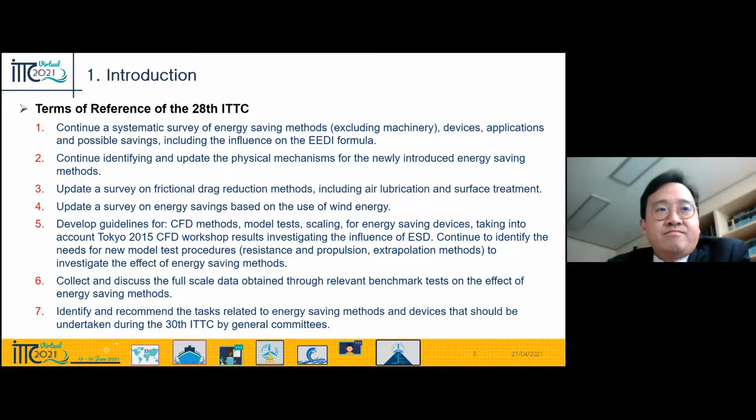As a matter of fact, this category was established in the previous term. It remains essentially unchanged. The primary category is about the principle, which means where the energy saving comes from. There are 4 primary categories regarding this.

The direct reduction is the first one, and reducing propulsive losses is the second, followed by use of renewable energy and operation, which will be shown in the next slide.

Each primary category is subdivided into specific mechanisms, how the energy saving principle is achieved. During the present term, the committee searched for new mechanisms, so a couple of modifications have been made for the gate rudder, and ducted contra-rotating propeller was added.

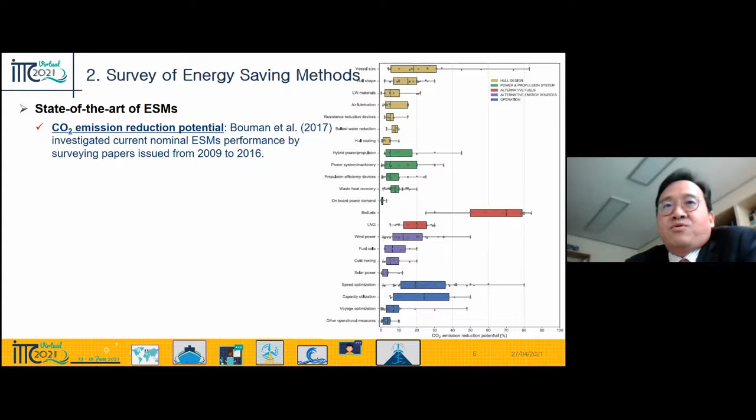The most notable technique is the air lubrication method, with several papers published based on both model tests and numerical simulations.

Another promising technique for skin friction reduction is to use low frictional coating. More and more interest is drawn to the effect of hull coating on energy saving performance. Goler and Bozkurt's work in 2017 is notable in that they analyzed the effect of hull coating on full-scale ship performance for 8 Ro-Ro vessels.

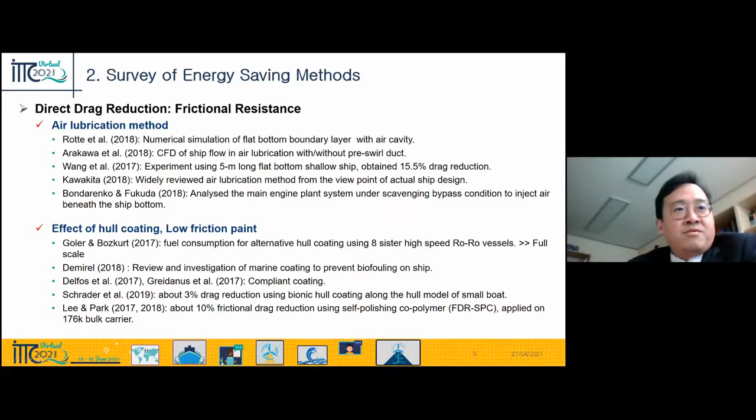Others are also notable, and let me move on to the next slide. The next technique is hull form optimization to reduce either viscous pressure resistance or wave making resistance.

If the hull form in the after part is improved, then viscous pressure resistance is reduced, and if the fore part is improved, then wave making resistance is reduced.

This technique is closely related to the improvement of CFD technique and computing performance, so more and more research is being carried out and published. The relevant keywords for hull form optimization are multi-fidelity meta-modeling, surrogate-based global optimization, and multi-objective optimization.

There is much literature, and a notable example is that hull form optimization is not only aiming at reducing calm-water resistance, but also added resistance, as shown by Yu et al. in 2017.

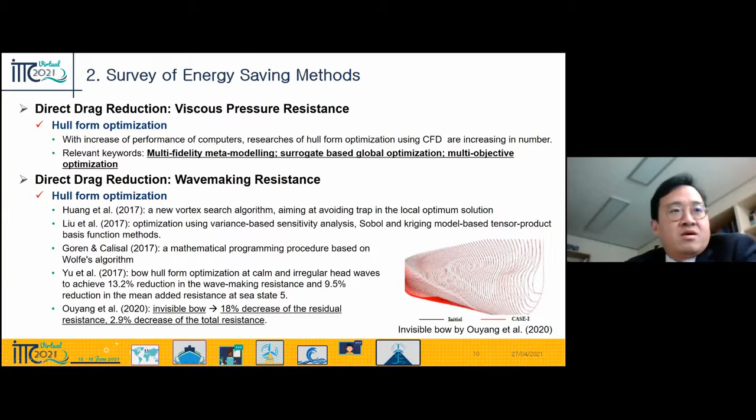Okay, the next primary category is to enhance propulsive loss, reducing propulsive losses by either enhancing relative rotative efficiency or rotational efficiency.

To enhance propulsive relative rotative efficiency, there are two examples as illustrated in these two figures. Of all the energy saving methods discussed in this presentation, perhaps the energy saving device would be the most popular ones to increase rotational efficiency. This subcategory includes pre-swirl stator or duct, rudder bulb, and rudder fin, PBCF, which means propeller boss cap fin, and

contra-rotating propellers. And the most notable literature is the EU's GRIP, which means Green Retrofitting Through Improved Propulsion project, which was carried out during 2016 and 17, and a special issue for reporting the results was published in International Shipbuilding Progress, volume 63.

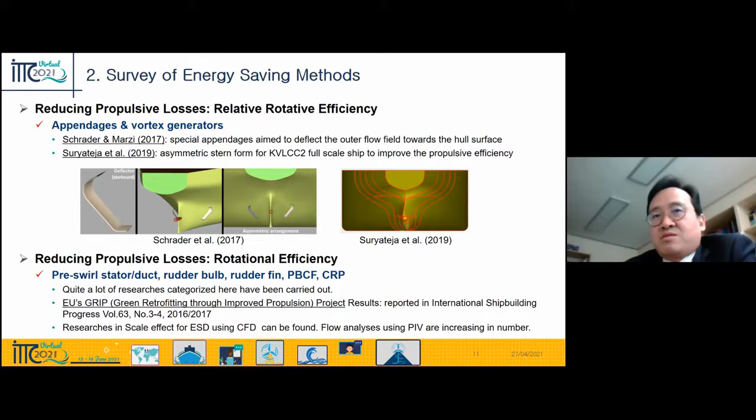There are a few reports on the full-scale data regarding this project, so those papers will be reported in chapter 6.

This slide summarizes the literature for pre-swirl duct. The most interesting example is Kim et al.'s paper in 2020, who emphasized the importance of roughness in the estimation of ESD performance at full-scale ship.

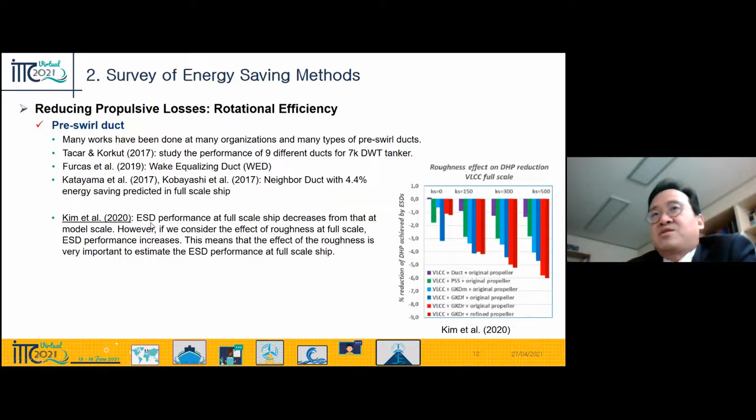Okay. For the pre-swirl stator, there are many researches carried out in a variety of organizations. Kim et al.'s paper, 2017, proposes an extrapolation method for analysis of a self-propulsion test with a pre-swirl device.

Based on this result, the committee proposed a guideline for wake scaling method for pre-swirl devices, which is going to be adopted by this full conference. And this guideline will be explained in detail in chapter 6.

Another interesting example is by Voermans in 2017 with a special design illustrated in the upper right figure.

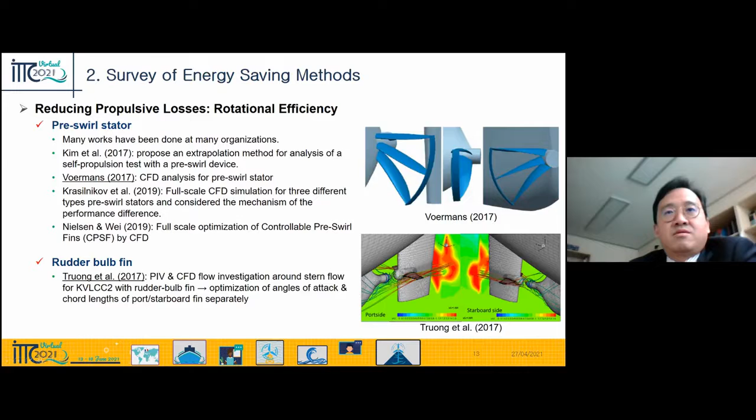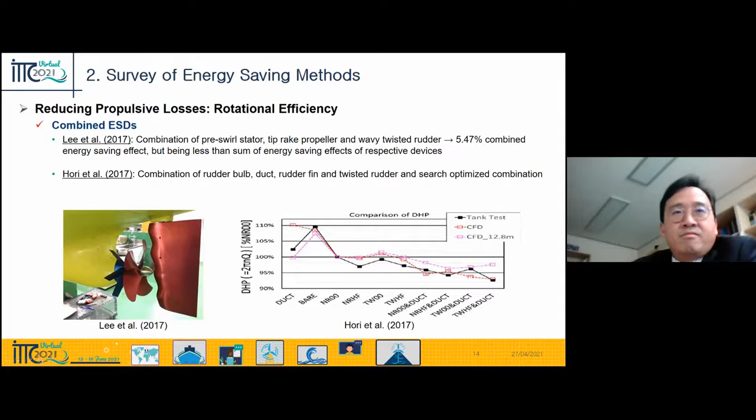Okay, let me move on to chapter 3, titled as Use of Wind Energy. According to Parker, there are several types of wind energy system which is implemented. They are Flettner rotors, kites or spinnakers, soft sails, wing sails, and wind turbines.

Smith et al. 2016 stated that wind propulsion is most effective at slower speeds, less than 16 knots, and on smaller ships, the dead weight from 3,000 to 10,000 tons. Those ranges of dead weights account for 1/5 of global cargo ships.

The typical energy saving effect by wind energy is reported to be up to 2 to 24% for a single Flettner rotor, 1 to 32% for a towing kite, and 10 to 60% for the eConowind sails.

However, there is indeed still a barrier to prevent wide adoption of wind energy solutions. These are the unfamiliarity with technology and safety and reliability concern and lack of demonstration. Therefore, we believe that more reliable full-scale data needs to be obtained to ensure the wider adoption of wind energy solutions.

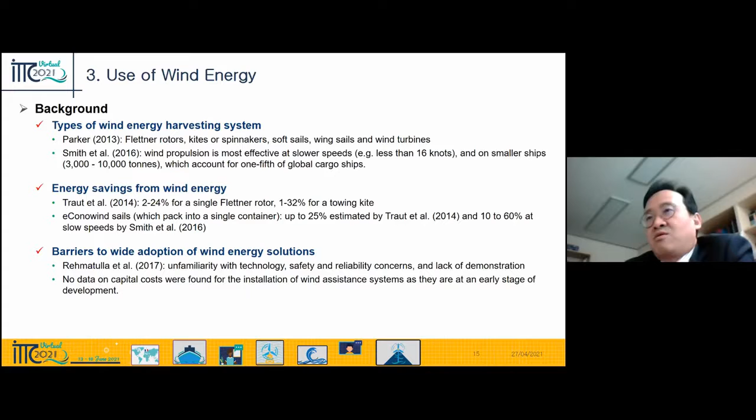Okay, the next slide is a list the representative type of wind energy system and its energy saving effect. Wing sail was investigated by Viola et al. in 2015 and shown to reduce the thrust up to 10%.

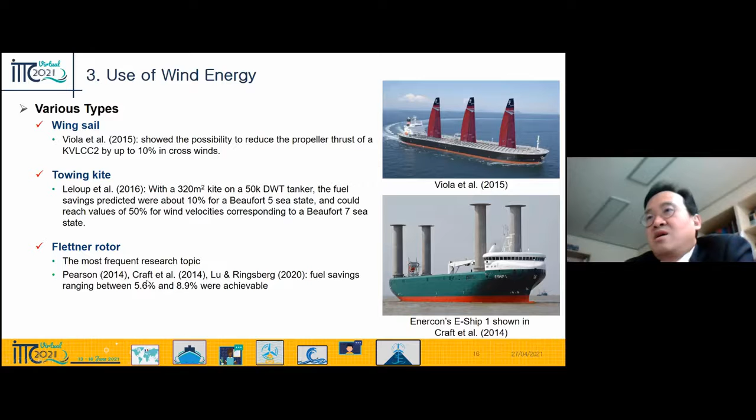For towing kite, the percentage of fuel saving was predicted about 10% for Beaufort 5 scale, even higher, as much as 50% for wind velocities corresponding to Beaufort 7 scale. For Flettner rotors, fuel saving ranging from between 5.6% and 8.9% were reported by these researchers.

Okay, the next task for chapter 4 is to identify the necessity for new guidelines for CFD, EFD, and scaling methods. The first topic is about the CFD methods for energy saving device.

The Tokyo 2015 CFD workshop is worth being noted, that was held at National Maritime Research Institute in Tokyo in 2015. The purpose of this workshop was the same as the preceding workshops, and it was to assess state of the art of the contemporary CFD codes for ship hydrodynamics.

In this workshop, 3 ship hulls were selected, and a total of 17 test cases were specified by the organizers, and 30 groups worldwide submitted their computed results for 1 or more cases.

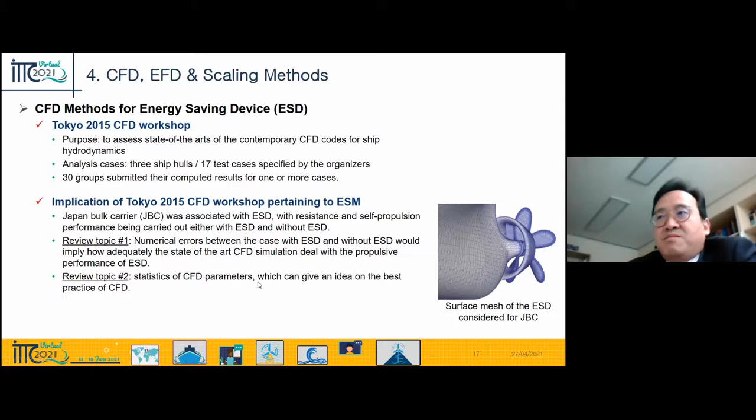That was review topic number 1. The next topic of Tokyo 2015 workshop is the statistics of CFD parameters, which can give an idea on the best practice of CFD.

This slide shows a comparison error regarding review topic number 1, comparison error in thrust coefficients and grid uncertainty for thrust coefficients. The first figure is about grid uncertainty, and the figure on the far right is the comparison of percentage error in thrust coefficient with the experimental results. The major checkpoint here is to see whether the errors in ESD cases are systematically larger than those in no-ESD cases.

Here you can see the error and uncertainty with ESD in bright gray, and without ESD in dark gray. In some cases the uncertainty or error with ESD is larger, but in other cases it's the opposite. So there's no evidence that ESD cases lead to systematically larger error or uncertainty. The answer is no, there is no evidence to support the inadequacy of current CFD technique in dealing with ESD. Therefore, the need for a particular dedicated CFD procedure for ESD is not identified.

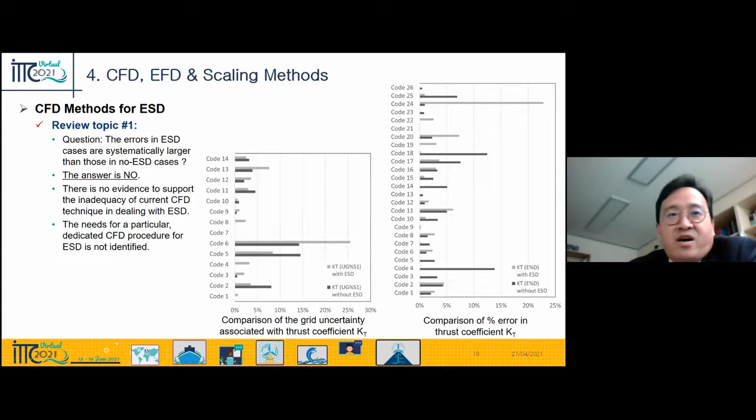The next slide is associated with the second review topic, the statistics of CFD parameters: the number of grids here, the distribution of wall function on the far right figure, and the size of computational domain, minimum and maximum. You can see there are wide variations in the parameters.

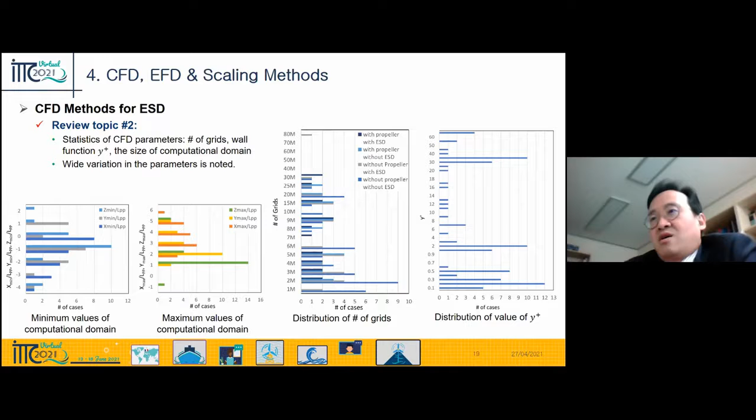The values for those parameters in our cases were compiled through questionnaire. So there is wide variation in the parameters, which might cause the wide variation of errors associated, as shown in the previous slide.

The next topic is related to CFD, to review a proposed guideline in PRADS 2016 conference. Hino et al. presented benchmark data for the validation of CFD simulation results for a Japan bulk carrier with ESD in the Tokyo 2015 workshop.

The committee aimed at identifying the necessity to set up a separate guideline dedicated to ESD simulation. So the committee had this proposed CFD guideline, published in PRADS 2016, reviewed by CFD experts in academia and industry.

The guideline section by Hino et al. was compared with the existing ITTC guidelines related to CFD. We got experts' opinions and concluded that some of the statements in the proposed guideline are not included in the existing guidelines. But on the other hand, it can also be said that those suggestions are largely already well known in the CFD community.

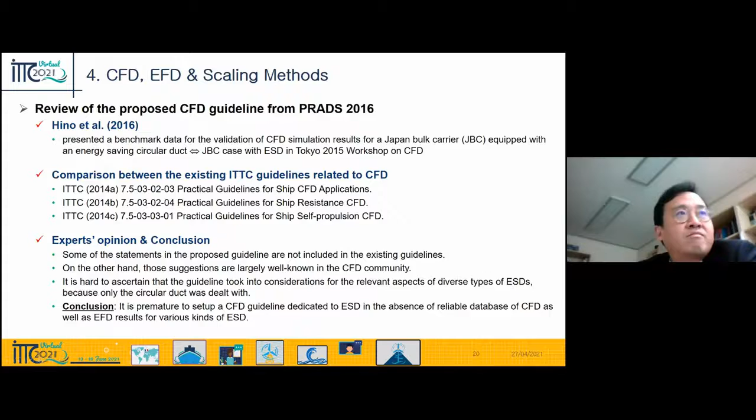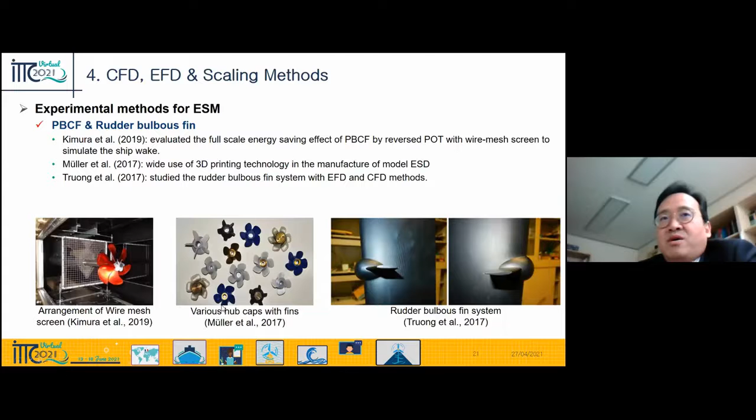The next section in chapter 4 is related to examples of new experimental methods for ESD. The first topic is for the test methods for PBCF and rudder bulbous fin, in which the usage of 3D printing technology in manufacturing model ESD is noteworthy, as you can see in this figure.

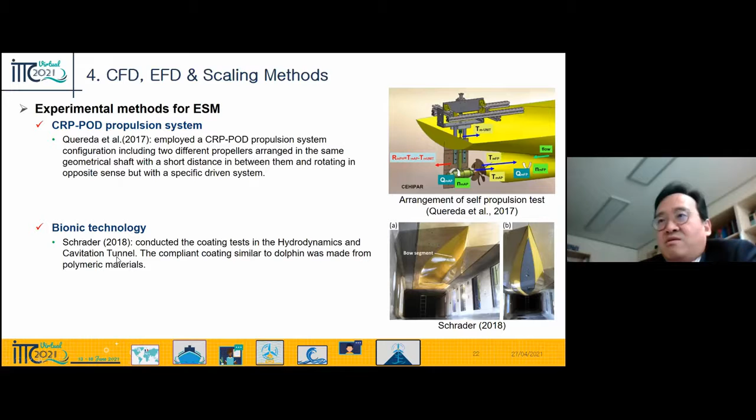This slide exhibits a couple of interesting model test apparatus designed to reduce the pitch motion due to waves, which consequently reduce the added resistance in waves.

Chiu et al. in 2018 installed a pitch collapsing bow fin energy saving device on a container ship model and verified the energy saving effect of about 4.29% by model test in waves.

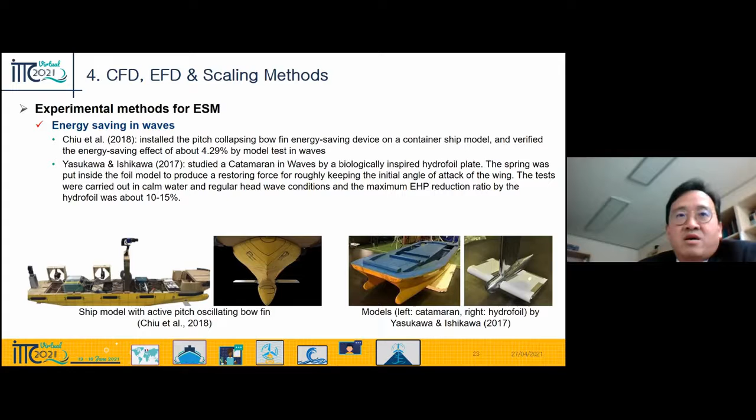Yasukawa and Ishikawa studied a catamaran in waves using a biologically inspired hydrofoil plate. Tests were carried out in calm water and regular head wave conditions, and the maximum EHP reduction ratio by the hydrofoil was about 10 to 15%.

Okay, let me move on to the next topic in the experimental method section.

Skin friction reduction is one of the promising techniques of ship energy saving, and air lubrication has been implemented in several tens of vessels so far.

In 2017, the 28th ITTC adopted a recommended guideline for resistance and propulsion test and performance prediction with skin frictional drag reduction technique, as a guideline to extrapolate the model test results to a full-scale prediction, adopted by the previous full conference.

However, the model test procedure for air lubrication in real practice has not been standardized yet, which may cause a significant deviation in the model test among model test organizations.

So the committee was asked by the advisory committee to give a more detailed description of model test procedure on air lubrication techniques, such as test condition, model scale pressure, and airflow rate corresponding to full scale.

In line with this suggestion, the committee carried out a survey to investigate the current status of model test practices involved with air lubrication among organizations.

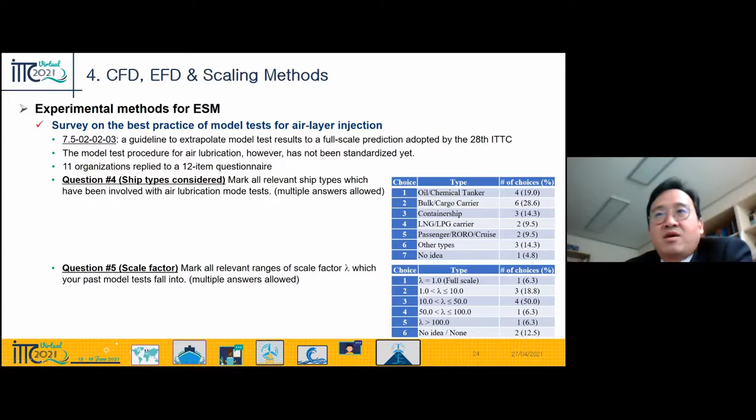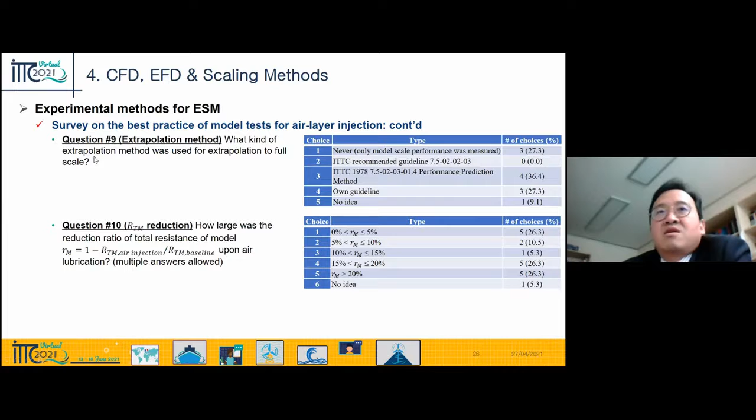For question number 9, the choices varied between no extrapolation, ITTC 1978, and own guideline. So it is notable that the newly adopted guideline has not been selected. Okay, this again proves the absence of a standard procedure related to the air lubrication model test.

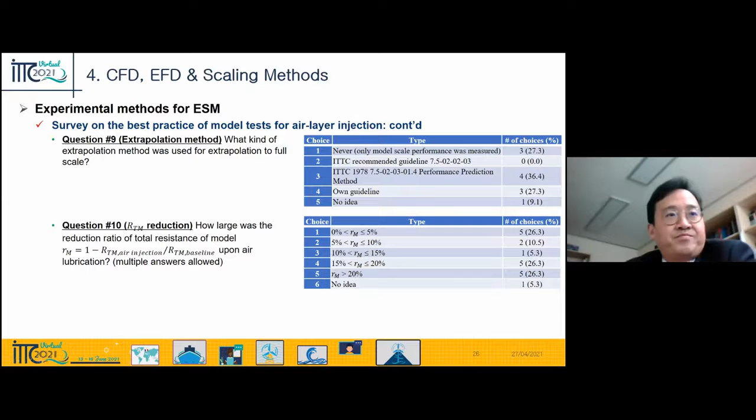Okay, the next chapter is about the recommended guideline to be adopted at this full conference. It is titled Scaling Method for Ship Wake Fraction with Pre-Swirl Devices. The purpose of this guideline is to complement the existing ITTC 1978 for ships equipped with either a pre-swirl stator or pre-swirl duct.

Let me begin by explaining wake scaling issues of ITTC 1978 related to pre-swirl devices. Pre-swirl devices can generate a counter-swirl flow to save rotational energy from the propeller.

For the prediction of powering performance, ITTC 1978 adopts the thrust identity method to find out the effective mean wake fraction. This is effective in the situation like figure 30A, but the difficulty in scaling arises from the point that the pre-swirl device makes not only a counter swirl, but also axial flow retardation.

It is therefore necessary to decompose the axial and tangential components separately, as shown in figure 30B. The presence of the pre-swirl device causes the relative velocity at the propeller blade to change as UR prime, with increased angle of attack, alpha plus delta alpha, and the thrust is increased.

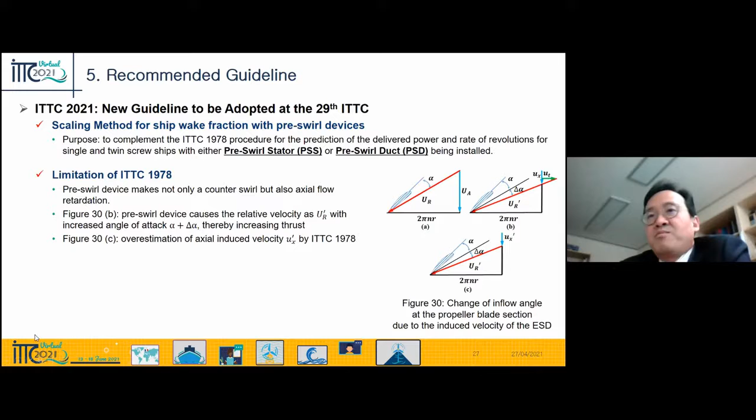So some remedy needed to be made to solve this problem. The inadequacy of the ITTC 1978 scaling led to an attempt to propose a new scaling in 1999.

That approach, called ITTC 99, was based on the final report of the specialist committee on unconventional propulsors. Among two approaches, method B, where the stator is considered as part of the hull, is now commonly referred to as ITTC 1999.

The major difference compared with the 1978 formula is this term, WMS minus WMO. Here the stator action was considered to be mainly of potential nature, because the main effect of the stator is to increase the angle of attack of the propeller blade.

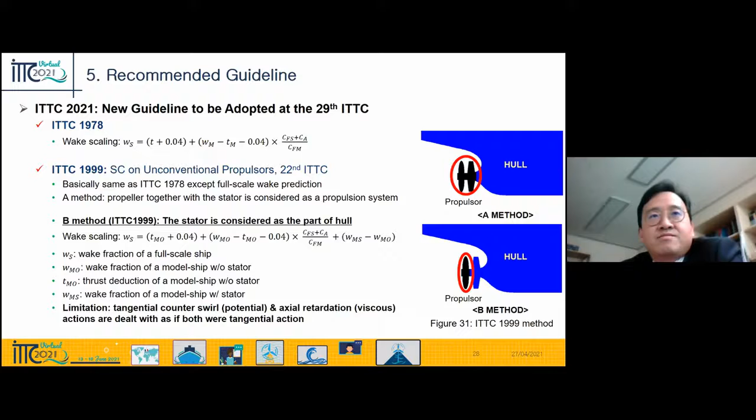Therefore, the difference in wakes with and without the stator is directly transferred to full scale. Even though this might be more reasonable than ITTC 1978, it cannot account for the viscous nature of axial retardation.

So with a view to improve both ITTC 1978 and 1999, there has been a series of researches in which axial wake and tangential wake are separately treated according to ship type and device type.

For instance, a pre-swirl duct is adopted for fuller, slower ships like tankers, while a pre-swirl stator is employed mainly for slender, faster ships like container carriers.

This is a compromise between 78 and 99, in that the axial velocity component and tangential velocity component are scaled separately. The axial wake, being of viscous nature, is scaled following ITTC 1978. The tangential wake, on the contrary, is scaled after ITTC 1999.

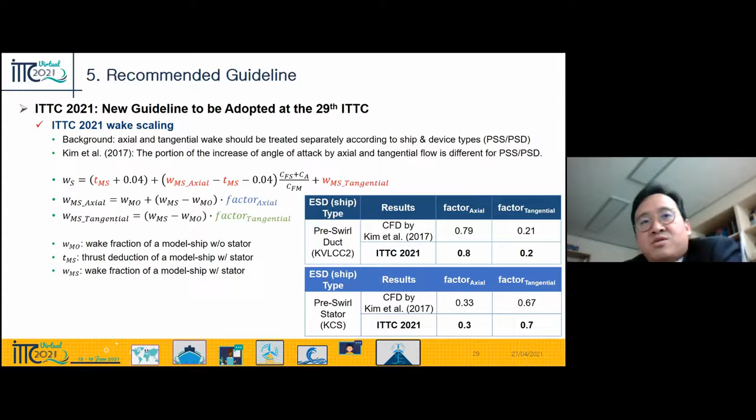Okay, that was the recommended guideline. I'd like to summarize the full-scale data.

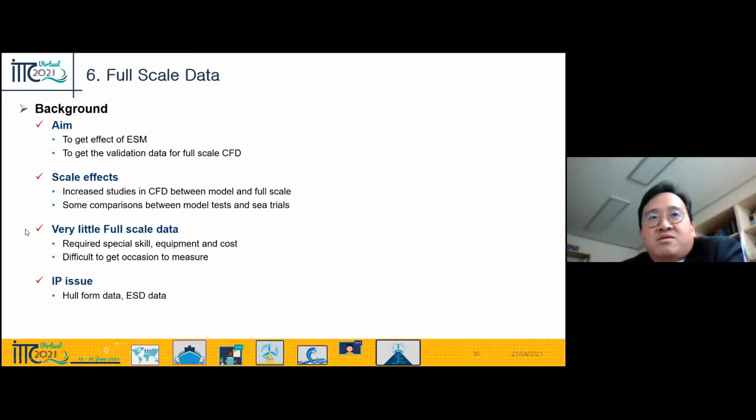The importance of full-scale data in proper assessment of ESDs cannot be overemphasized. However, full-scale data for ESDs is very limited, so we always need relevant full-scale test campaigns for energy-saving methods. I'd like to summarize the full-scale data published in open literature.

The first category is energy-saving devices, and the most notable literature is Hasselaar and Xing-Kaeding in 2017, who reported sea trial results with and without the pre-swirl stator and compared them with full-scale simulation results. This study was carried out as part of the EU's GRIP project, which was introduced before, from 2011 to 2015.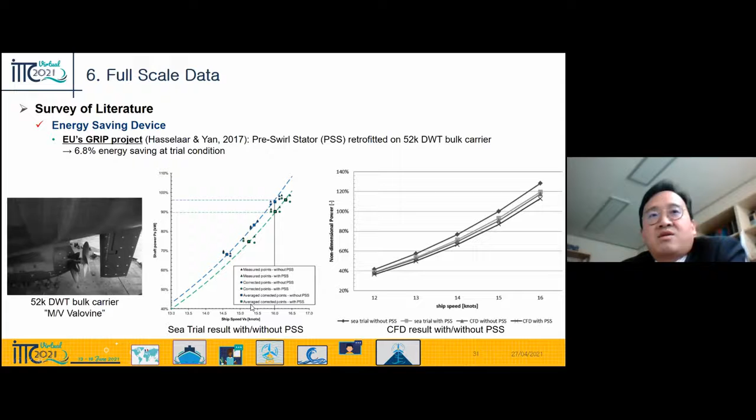As you can see in this speed-power curve, a 6.8% energy saving in trial condition was reported.

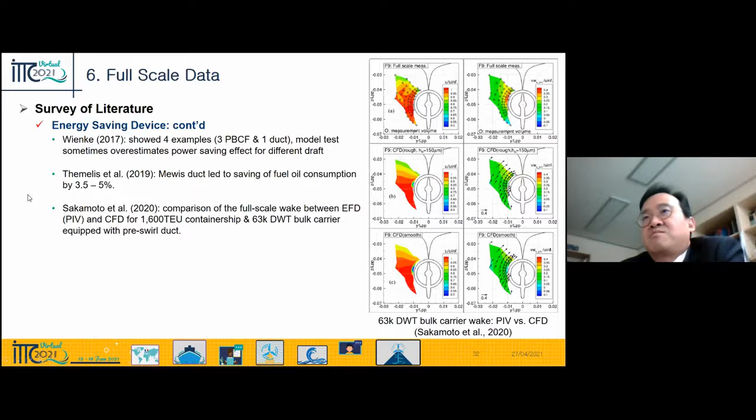Wienke showed four examples of the PBCF and one duct. Model tests sometimes overestimate the power saving effect for different drafts. And Themelis et al. reported that a Mewis duct led to savings in fuel oil consumption of 3.5 to 5%.

The next topic of drag reduction is air lubrication and low frictional coating. De Freitas introduced full-scale data of an air-lubricated 40K chemical tanker and showed about 5% saving on average.

The next topic is low frictional coating. Cho et al. carried out ISO 19030 analysis for in-service performance of a 176K bulk carrier, and it was found that the speed increased by 3.7% due to the friction-reducing coating, which is equivalent to 11.7% power saving.

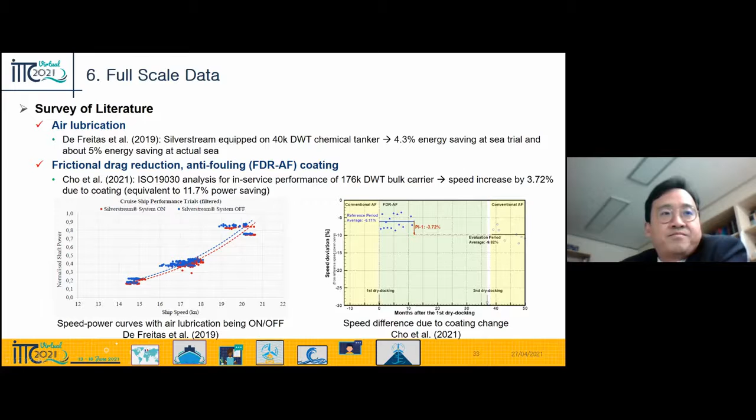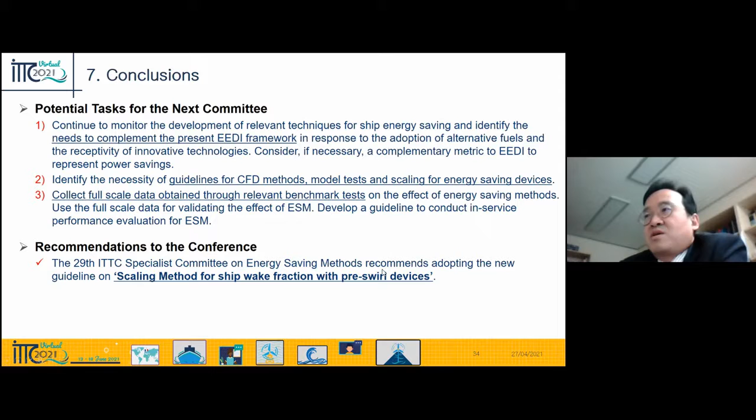Recommend to the conference that the 29th ITTC Specialist Committee on Energy Saving Methods recommends adopting the new guideline on scaling methods for ship wake fraction with pre-swirl devices. That's it, that concludes my presentation, and thank you very much for your attention.